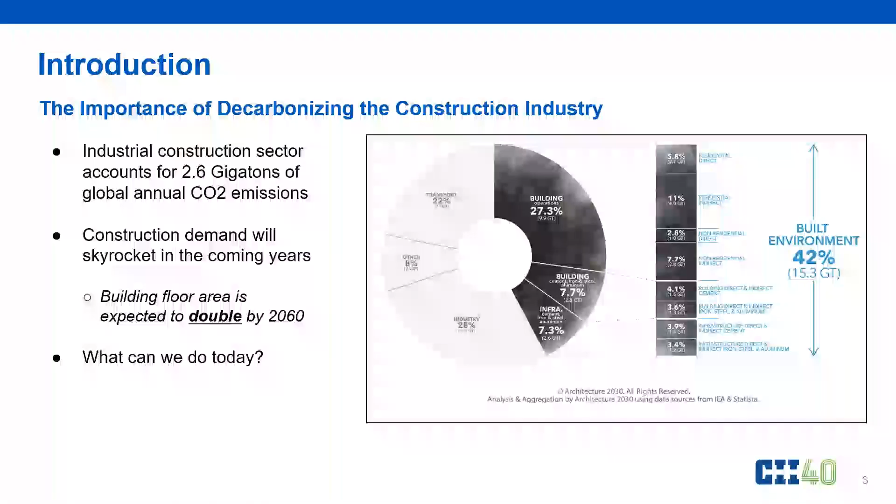So now that we've set the stage, I'd like to really go through the agenda for today, and without further ado, we want to get right into it. So we'll start off with introductory definitions, and then we'll move into the RT-411 goals and the scope of work, the overview of the research team and the work in progress.

So we want to be able to demonstrate the status of things and where we're at. We want to hold also on the decision making within projects so that we have an influence on the operational carbon. But remember, our focus is on the project phase, on the construction phase, and as we build those toolkits, we don't want to ignore that future of looking ahead.

The tools to track this embodied carbon, how are we going to do that? And strategies to reduce the carbon as we look forward, and then finally what we would expect and the next steps.

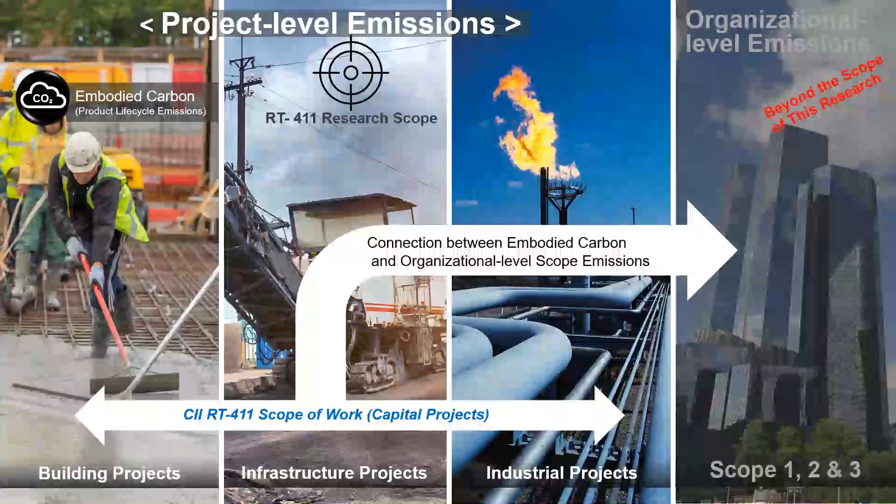So let's start with the organization level emissions first. The Greenhouse Gas Protocol classifies companies' emissions into 3 scopes: Scope 1, Scope 2, and Scope 3. Scope 1 emissions relate to the emissions from sources directly owned or controlled by the reporting company, such as facilities and vehicles. So for example, if a company is using electric vehicles for its staff, this would lower its Scope 1 emissions.

Scope 2 emissions are related to indirect emissions from the generation of purchased energy, purchased electricity, heating, and cooling for own facilities. So again, for example, if a company is getting its energy from renewable energy sources, this would lower its Scope 2 emissions, unlike getting it from fossil fuel-based power. Scope 3 emissions are another class of indirect emissions.

So we have Scope 1 is direct emissions, Scope 2 and 3 are indirect. Scope 3 emissions are another class of indirect emissions, not included in Scope 2, that occur in the value chain of the reporting company, including both upstream and downstream emissions. And again, this is not the scope of RT-411. We're not focused on organization level emissions, but it's very important to highlight the difference between organization level emissions and project level emissions and build the connection between both.

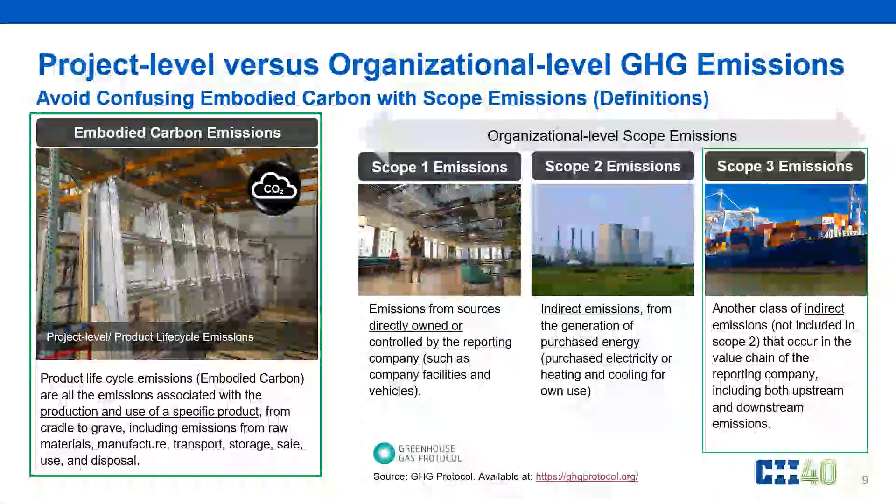So on the other hand, we have embodied carbon emissions, also called product lifecycle emissions, which is the focus of RT-411 research. This is related to all emissions associated with the production and use of a specific product or assembly or material in our projects, from cradle to grave, including the raw material, the manufacturing, the transportation to site, the construction, the use and end of life, disposal and recovery of this product.

So the focus will be on project level emissions, embodied carbon of the products and materials used in our projects. However, as I said, we need to clarify the differences between both topics. So I'll go back to the Scope 1, 2, and 3 emissions. According to the Carbon Disclosure Project, CDP, across all sectors, construction, oil and gas, transport, and many others, Scope 3 emissions account for an average of 75% of total Scope 1, 2, and 3 emissions.

Since Scope 3 represents the majority of emissions for many sectors, it's crucial that companies are aware of and are able to measure all the relevant sources of Scope 3 emissions across their value chain. But this is complex. That's why I would see many companies are reporting their Scope 1 and Scope 2 and ignoring Scope 3, because it's a complex topic.

And as you can see, Scope 3 emissions have 15 categories divided between upstream and downstream activities. For the most significant by size Scope 3 categories for the construction sector, for example, where the bulk of emissions occurs, they are coming from Category 1, purchased goods and services upstream, Category 4, transportation and distribution upstream, and the use of sold products downstream, Category 11. It's complicated, that's why companies are avoiding it, but we'll touch upon this and try to build a connection between the embodied carbon and the Scope 3 emissions specifically.

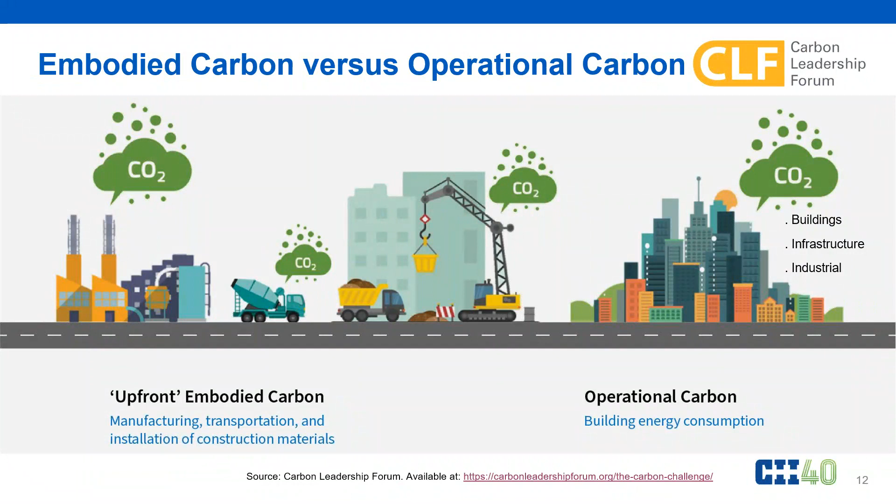So now we'll go back to the project level emissions, which is the focus of our research group. And in project level emissions, we have 2 types of emissions, embodied carbon and operational carbon. We defined embodied carbon already as the upfront carbon related to the manufacturing, transportation, and installation of our construction materials, assemblies, and products used in our capital projects. On the other hand, we have operational carbon, which is the emissions related to the building energy consumption during the use stage of the project. This could be for buildings, infrastructure, or industrial projects, but this is beyond the scope of our research.

And someone might ask, why embodied carbon? Why did RT-411 select embodied carbon as its scope versus operational carbon? And the argument could be that operational carbon, as we speak, accounts for 27% of the total emissions from the built environment, while embodied carbon emissions account only for 13%. So it might make sense that operational carbon is more important.

This might be the case today, but according to the Carbon Leadership Forum, embodied carbon will be responsible for almost half of the total new construction emissions between now and 2050. So in the coming 25 to 30 years, there will be growing significance of embodied carbon over operational carbon. That's why we chose embodied carbon.

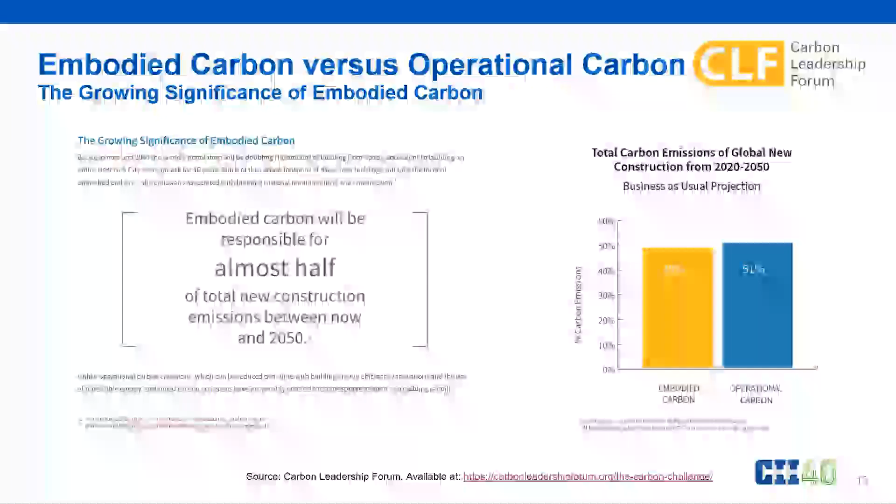And the justification for this is that, unlike operational carbon emissions, we can reduce operational carbon over time with building energy efficiencies, renovations, and the use of renewable energy. However, for embodied carbon, we cannot do that. Once the building is built or the product is manufactured, the embodied carbon emissions are released into the atmosphere irreversibly. We cannot do anything about it. That's why it's more important. There is an urgent need to address this topic to meet our climate targets in the industry.

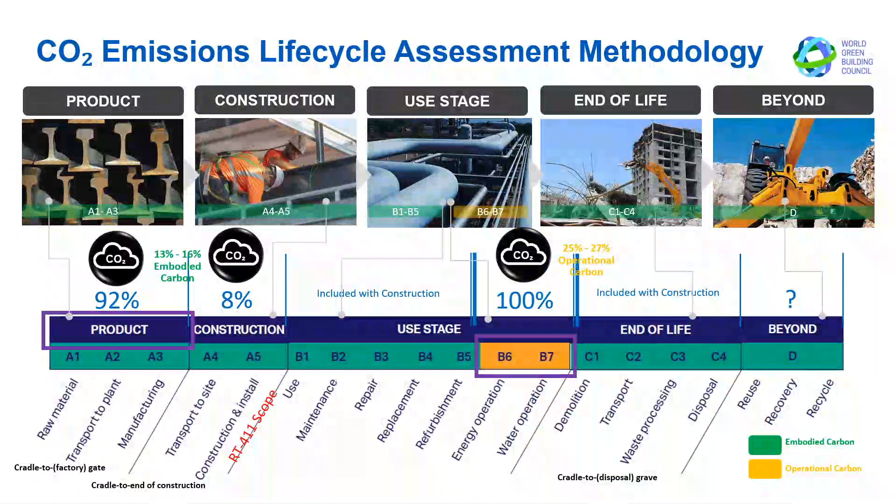But please note that B6 and B7, highlighted in yellow, are operational carbon. So everything you see in green is embodied carbon emissions, except B6 and B7, the emissions related to energy and water operation during the use stage. And it's worth mentioning that the product stage, stages A1 till A3, accounts for 92% of the total embodied carbon emissions across the life cycle. That's why it's a very important stage.

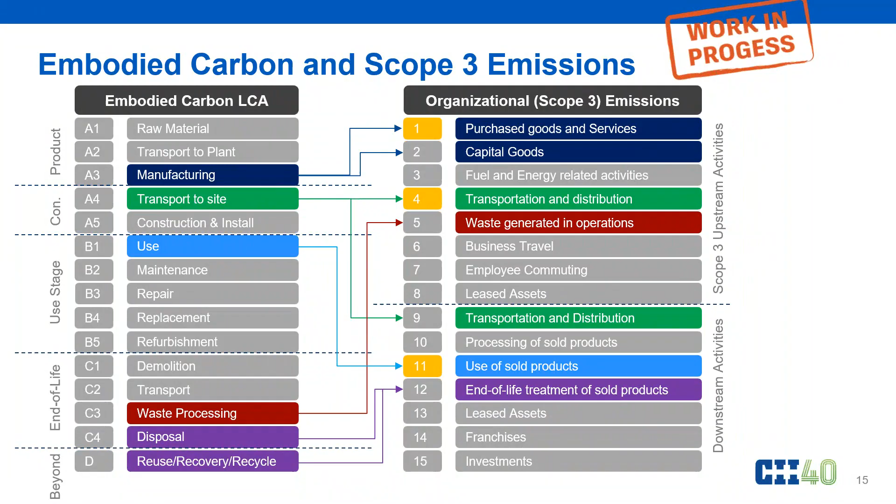The main goal of RT-411 is to develop an understanding of how to decarbonize the delivery of capital projects. The first step towards decarbonizing is to decide to. Then identify what is the embodied carbon and how to track and measure it.

We're developing steps to identify potential decarbonization strategies for capital projects, as well as key decisions to be made, including design considerations and techniques that can be implemented that encourage decarbonization upfront, material selection and composition, supply chain considerations, and construction techniques. We are reviewing and evaluating the available tools and their applicability and usefulness to capital projects.

Next slide, please. Our research is applicable to all industry sectors, but with special attention being paid to industrial projects. We do think this report will be applicable to your project. In order to get a full grasp of capital improvement projects' carbon emissions, it is necessary to understand individually the upfront embodied carbon and the operational carbon emissions, but also their interrelationships.

Whole life carbon thinking means considering these emissions together to optimize their relative and combined impacts, thereby avoiding the unintended consequences of assessing each in isolation. A true low carbon project is one that optimizes a capital improvement resource, both to build it and to use it over its lifetime.

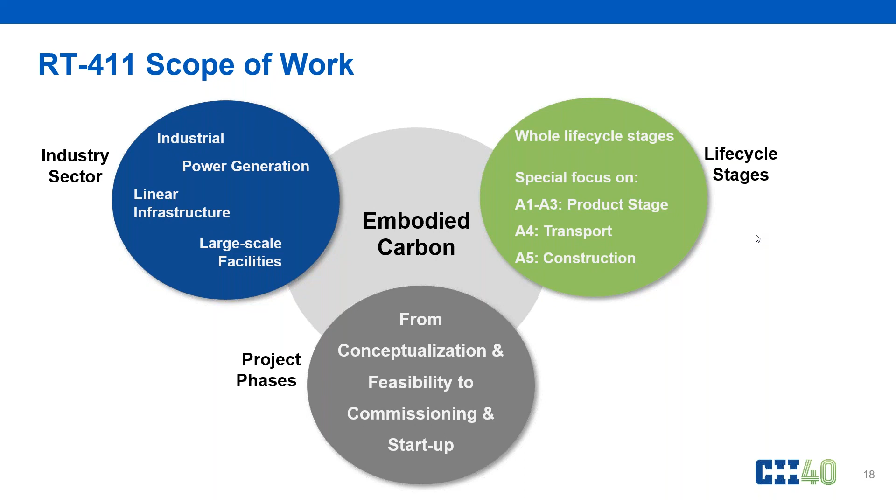Due to the scope of our research and the size of our team, RT-411 employed the working group approach, which has divided the scope into significant components. Each group has specific responsibilities, and they then conduct investigations, align and integrate findings. Group 1, led by Hassan, is identifying existing toolkits and sources to track and report embodied carbon. James, who you'll hear from in a minute, is leading Group 2, researching the main materials contributing to embodied carbon, metrics of their emissions, and low carbon alternatives.

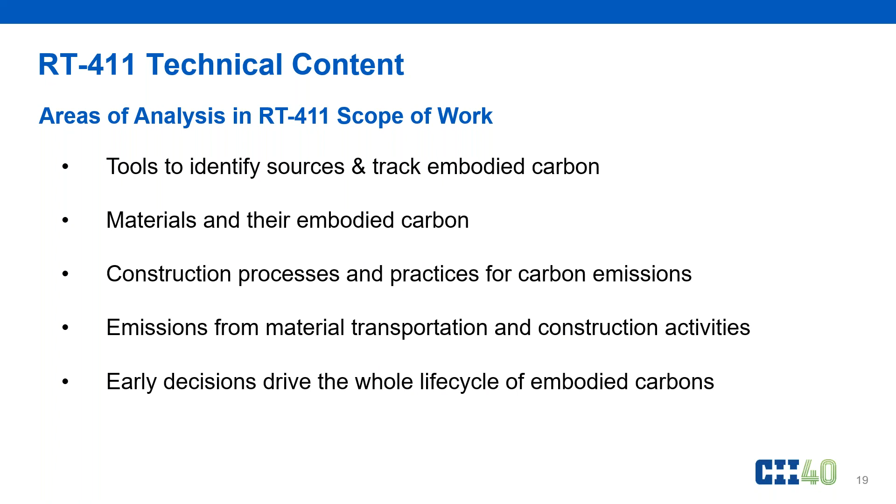Group 3 is recognizing the impact on decarbonization of processes in FEP and EPC. Group 4 is to identify the sources of emissions during transportation and construction phases and strategies to reduce those emissions. And Group 5 will identify and evaluate the overarching decisions that must be taken by any entity to encourage decarbonization of the whole carbon life cycle of its capital projects.

And next, we have another survey for you. Vinay? Yeah, so if you could share with us your organizational drivers and goals: what are your company's drivers for decarbonization?

Okay, does your company have a decarbonization related goal? If yes, does your organization have a target as to when the organization will achieve this goal?

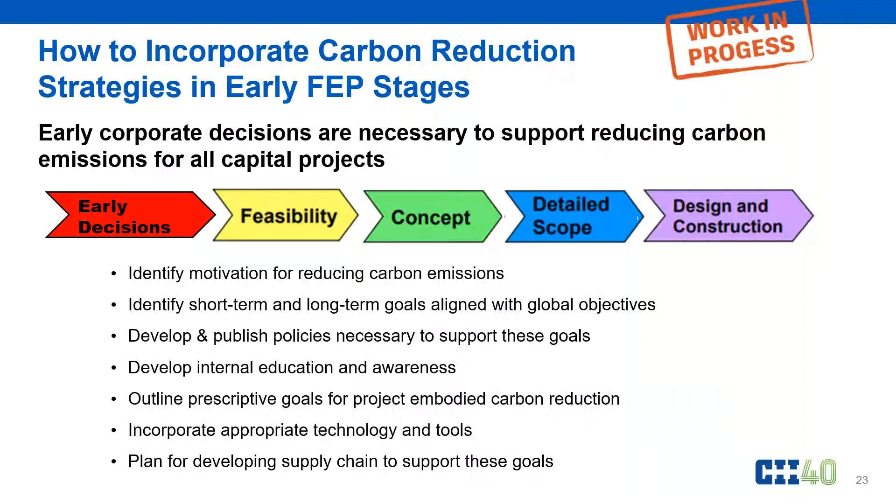Thank you, Cheryl. So in this section, we'll discuss the embodied carbon digital tools available in the market. There is a myriad of tools available to measure, track, and report embodied carbon in capital projects. This is a non-exhaustive list of some of the available tools identified by the research team so far that could be classified into 4 categories. Because despite the myriad of tools available in the market, they vary widely in their goal, target audience, cost, and category of tool.

So the identified tools that we have listed here on the screen, and there are more than that, we have tried to classify into 4 categories of calculator types. Starting with the carbon calculator, these tools are typically simple tools that help the project team to have an understanding of the order of magnitude of the carbon emissions, allowing for quick decision making at the early design stages.

They could be Excel-based tools or integrated with BIM if a 3D model is available. The second category of tool is product assembly specific calculators. These tools assess the embodied carbon of specific building assemblies or components, such as concrete, for example. So they do not perform whole building life cycle assessment. They are focused on one assembly or material or product within our project.

The third category of tools are product selection procurement tools. These are most helpful during the procurement process, helping the project team to make informed decisions and choices based on selecting the specific products based on environmental product declarations developed by the manufacturer and verified by a third party, and in accordance with the ISO standards or ANSI standard. This is a reliable data source at this critical stage of the project.

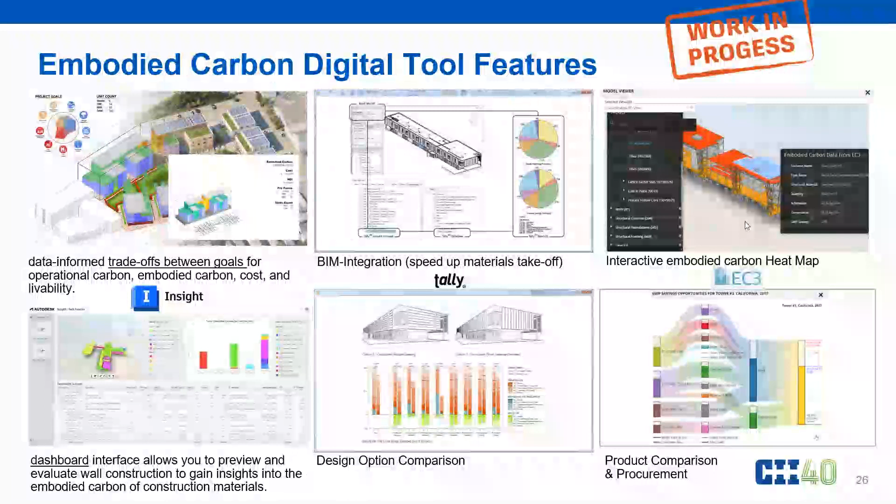Scope boundaries: does it cover cradle to product, cradle to end of construction, or cradle to end of life? This is a major criterion in selecting your tool depending on your project stages. We'll highlight any limitations that we have identified as a group, applicability to capital projects, and many other evaluation criteria. It's very comprehensive. We'll do this for all the tools that we have identified in the research. Next, please.

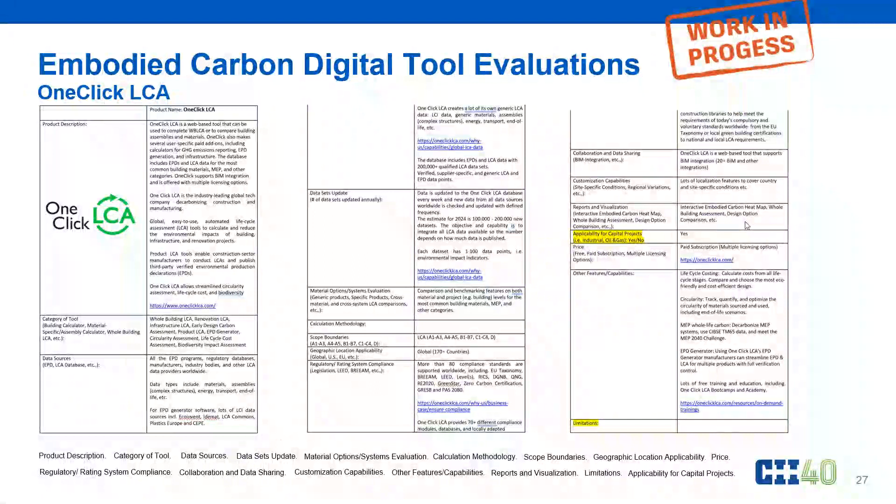Another important section of the digital carbon tools is the toolkit section. And in this section, we'll try to answer 2 questions, the what question and the how question. What is the most appropriate software to use at each stage of the FEP stages? So some tools are applicable for FEP stage 1, scoping, study, and feasibility. Others are applicable for preliminary engineering. Other tools are applicable for the procurement stage, selecting the product at this critical stage.

And also, this toolkit section will try to answer the how question, how to calculate embodied carbon, and perhaps also how to develop custom solutions, especially in case of industrial projects where there is limited availability of tools applicable to industrial projects. And of course, we have the whole building lifecycle assessment tools that could be used across the entire FEP stages, as we said earlier.

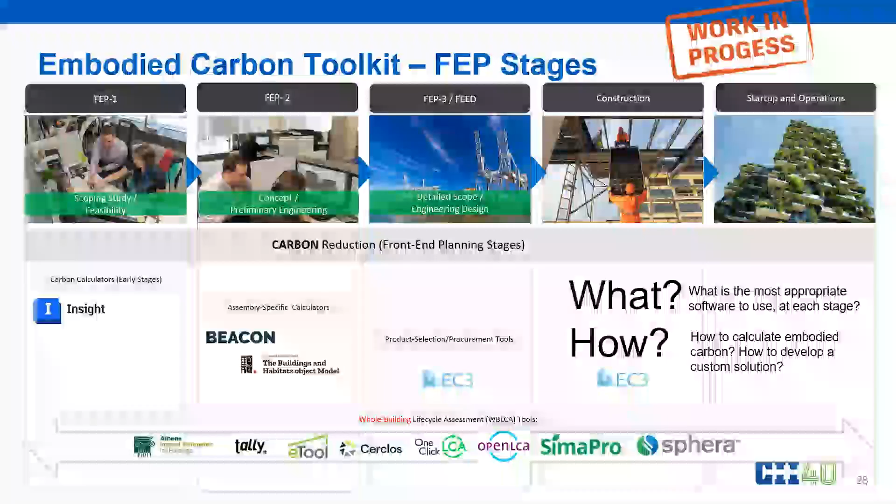And finally, to wrap up this section, we have identified some preliminary findings, 3 findings so far. The first is that the majority of existing decarbonization digital tools are mainly for the architecture, engineering, construction industry, mainly focusing on the building sector. The second finding is that there are limited tools available for industrial projects, especially oil and gas projects. And this is due to the non-availability of data.

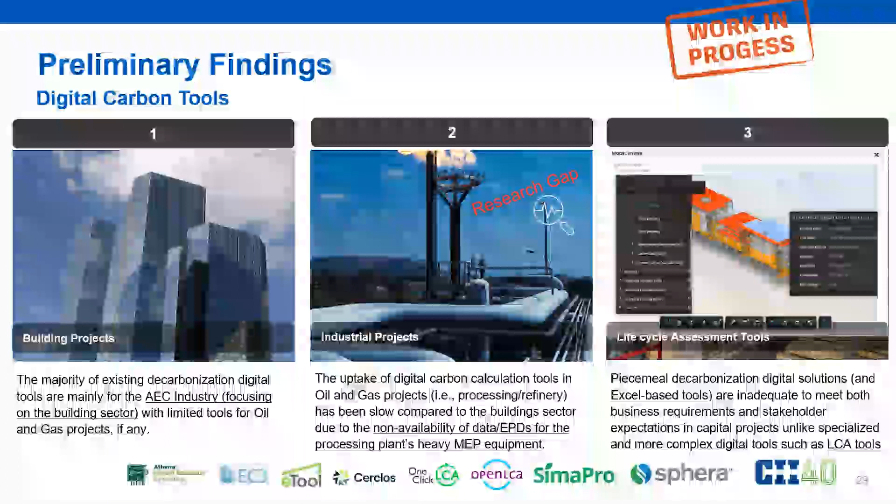We lack environmental product declarations by manufacturers for some of the major MEP equipment of the processing plants, for example. So our early recommendation is that you work with your value chain, with your manufacturers, and try to develop these environmental product declarations and provide the data. Once we have this, the existing tools for the building sector could be used for industrial projects. There is no problem. So for example, the EC3 tool for product selection at the procurement stage could be used for industrial projects, provided that the environmental product declarations or data are available.

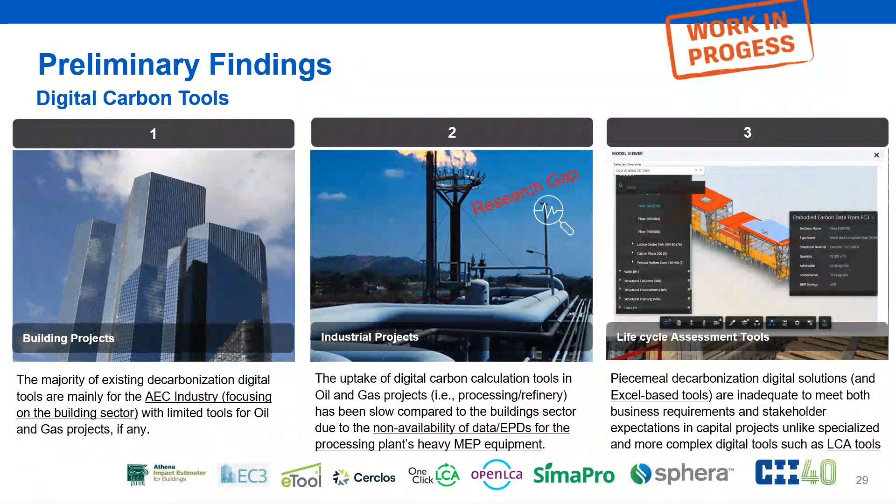So I think we need to work as an industry to push the industry forward, developing more EPDs, having more data about the carbon emissions of our equipment, material, products and assemblies in our industrial projects. The third finding, and I already touched upon this, is that Excel-based tools or piecemeal decarbonization digital solutions are not applicable for capital projects. We think that the way forward, the best tools, are lifecycle assessment tools, such as the 8 tools identified in the slide. And I'll pass it here to James.

All right, thank you, Hassan. So the research team is using 2 different case studies to demonstrate the principles and information gathered by the team. The first case study is a standard solar power plant that uses adjustable photovoltaic panels on a steel structure. This is a project at the very beginning of its project lifecycle in FEP0.

The second case study the research team is using is an industrial petrochemical project located on the US Gulf Coast. It is a C3 splitter which transforms a mixture of propane and refinery-grade propylene to polymer-grade propylene. The information that the team is using is based on a project at the end of FEP2 or FEED, with typical engineering deliverables at an issued for design level of development and a detailed 10% estimate available. We are utilizing these case studies at 2 ends of the project spectrum to demonstrate the different analysis available to each project depending on where they are in the project lifecycle.

All right, so our research team is focused also on the 5 material groups. So this would be stages A1 to A3, as we just talked about. We're looking at concrete, steel, glass, asphalt, and pipe. Concrete and steel are well documented as being 2 of the biggest carbon emitters out there, and 2 materials fundamental to a modern society. These materials overall were chosen due to their importance and prevalence in the commercial and infrastructure space, as well as the heavy industrial environment.

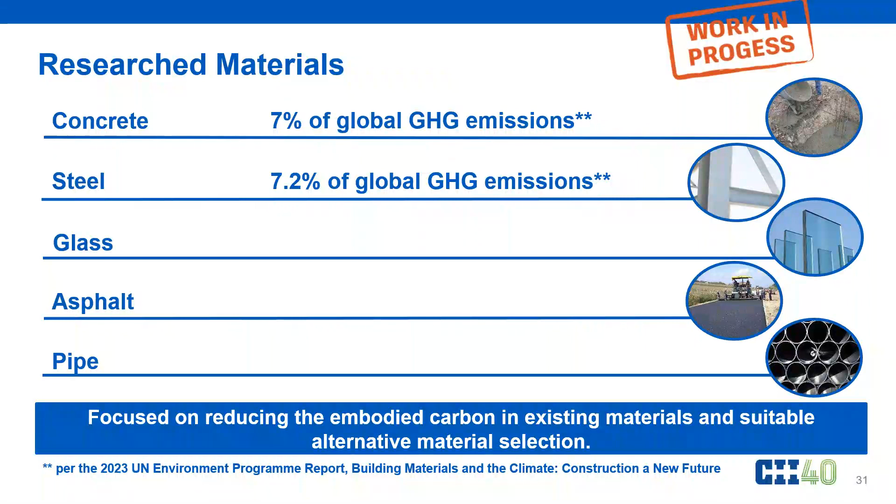When it comes to pipe, we are looking at doing some comparisons and analysis between several different metallurgies: carbon steel, stainless steel, HDPE, PVC, and concrete pipe. We are looking at the hurdles faced by the industry to decarbonize each of these materials and focusing on methods available to reduce embodied carbon in the current manufacturing process, as well as possible alternative materials that are available. So let's give a peek behind the curtain here on what the research team is looking at. And so here are some of the details on steel that will be discussed in our upcoming paper.

So let's talk about the steel manufacturing process. The first step is the mining of the iron ore. The ore then goes to a steel mill for reduction and smelting. And the last step, the structural shapes made at the steel mill are purchased and sent to a fabrication shop where the steel is modified to align with the detailed design drawings.

I've included some average numbers for embodied carbon over the steel production process. These are stages A1 to A3. These numbers above total to 1.7 metric tons of CO2 equivalent per metric ton of steel. And you can see the largest carbon emitter by far in this process is that middle block, which includes the reduction and smelting process at the steel mill.

It is important to note that the carbon footprint of steel can vary noticeably depending on the process and fuel used for steel production. The traditional route of a blast furnace and basic oxygen furnace accounts for roughly 72% of the current steel production. It is the largest carbon emitter.

Direct reduction of iron and the electric arc furnace account for about 6%. And then scrap steel sent directly to an electric arc furnace accounts for 22%. The electric arc furnace has a noticeably lower embodied carbon number due to the use of electricity to produce heat.

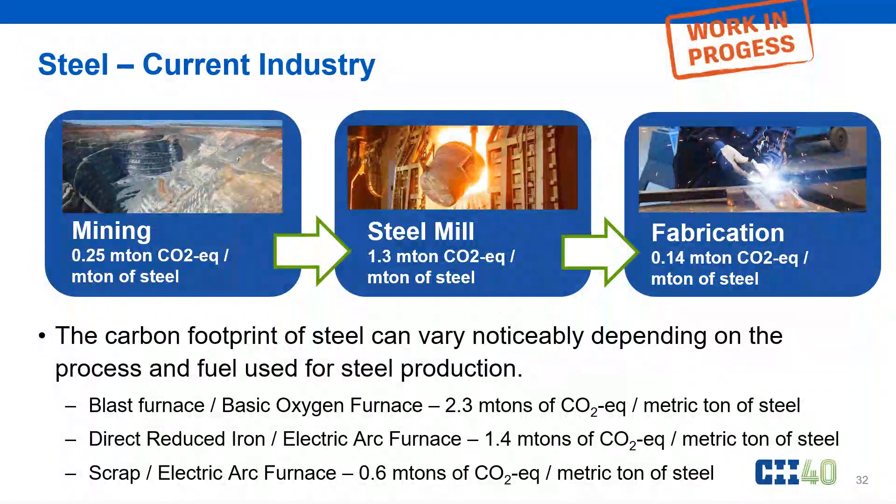So recycling is not a silver bullet for all problems. It certainly helps. Steel is the most recycled material in the world, and about 40% of all steel produced is created through recycling. However,

according to the World Economic Forum, steel demand is projected to rise by 30% by 2050. So we're not able to recycle our way out of this problem. We need to decarbonize the steel production process. So let's talk about what that might look like.

The current path to decarbonize steel relies on increasing the steel produced from the DRI to electric arc furnace process. As mentioned, this process is currently at 6% of total steel production, and it represents 1.4 metric tons of CO2 equivalent per metric ton of steel when we're talking about embodied carbon.

Renewable electricity would further reduce the carbon footprint. And we are starting to see several steel mill projects come online in the next few years that will run on solar, wind, or even hydro power. Growth trajectory of the DRI and electric arc furnace process would also require that natural gas or coal be replaced by green hydrogen as a reducing agent in the direct reduction process.

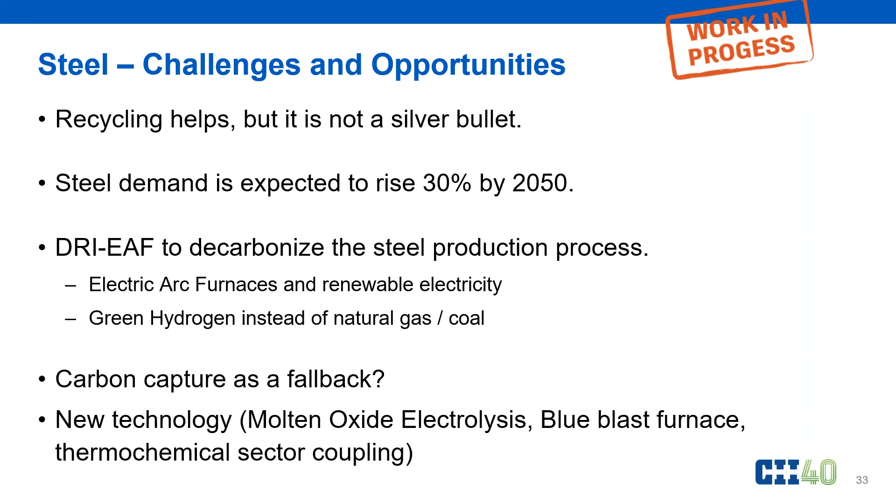All right, let's talk about construction execution. So we talked about materials. Those were A1 to A3. Now let's talk about construction execution. If you're looking at that life cycle assessment, you're looking here at A4 and A5 in the LCA process.

So the research team is also looking at ways to reduce the carbon footprint and improve sustainability of the construction execution effort. When it comes to logistics, we plan on using the case studies to demonstrate the supply chain analysis to determine carbon emissions as a possible decision point, balanced against cost and schedule when evaluating bidders.

We're also looking at methods and options for carbon reduction when it relates to construction equipment, as well as temporary facilities and site services. Overall, the goal here is to develop an actionable set of activities to reduce carbon emissions and improve sustainability during the construction process.

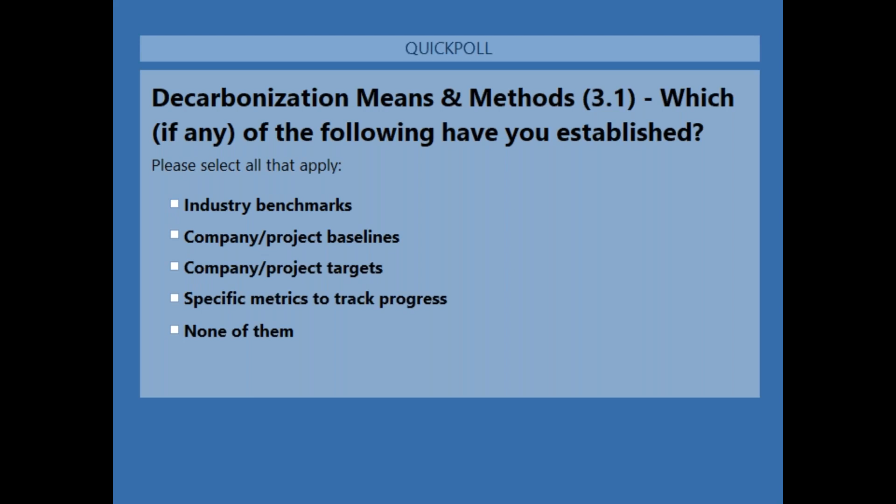All right, so moving on to the next polling question. So if your company calculates embodied carbon at the project level, what is your method or your source? So again, select all that do apply.

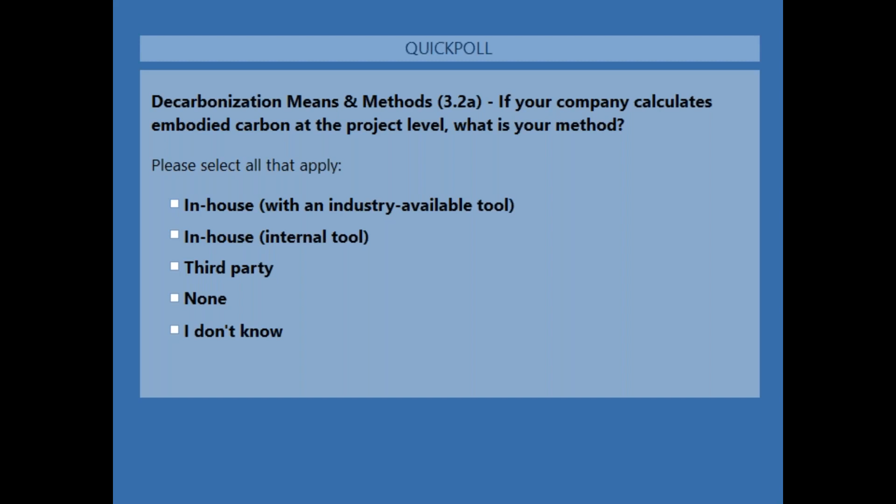Okay, if the answer is in-house with an industry available tool, what type of tool do you use? Hassan took us over some of the tools. We're interested in what type you do use as part of our research data.

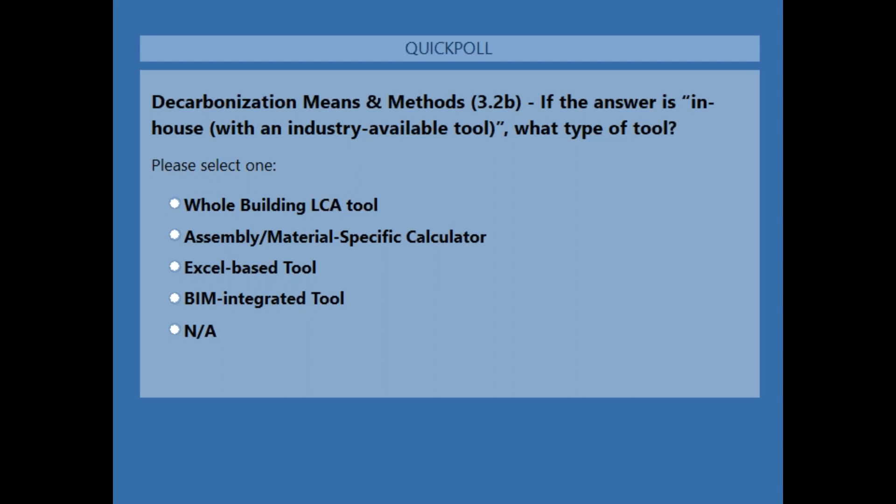All right, so the next polling question is which, if any, low carbon materials or elements or products are you sourcing? Low carbon materials, elements, or products.

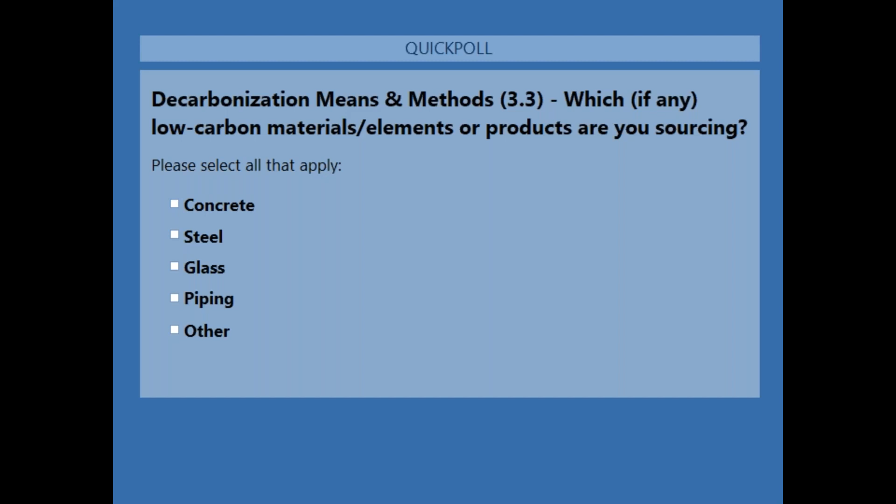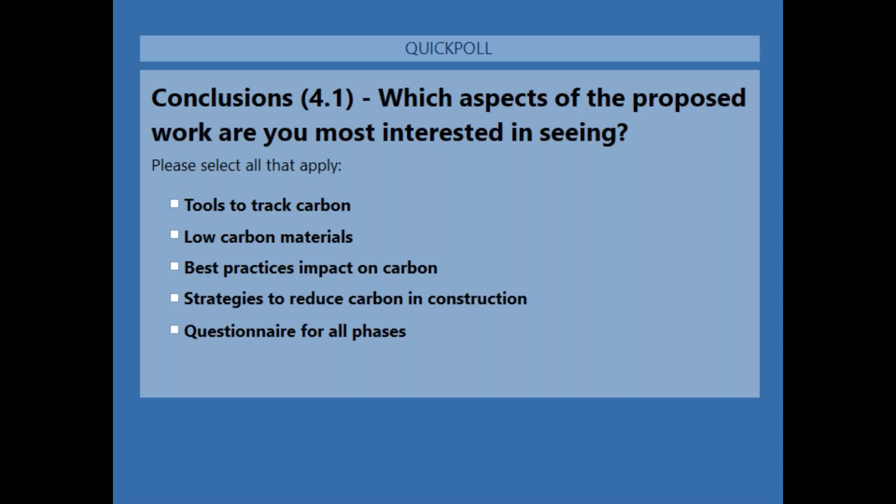To communicate effectively, we need to use language and terms that resonate with executives, project managers, and the range of stakeholders in all participating and affected groups. For them to embrace and apply decarbonization practices, we need to put ourselves in their shoes and tailor suggestions and recommendations that are sensitive to their specific roles and responsibilities.

Finally, it's imperative that we communicate in a collaborative manner with suppliers, recognizing and rewarding their efforts to provide essential information about the embodied carbon of the materials, equipment, and services they provide. Next slide, please.

Looking forward, what can you expect from our research team? We plan to present our findings at next year's conference in the summer, and of course, hope you'll be able to join us for that in person. Later in 2025, we will publish our findings.